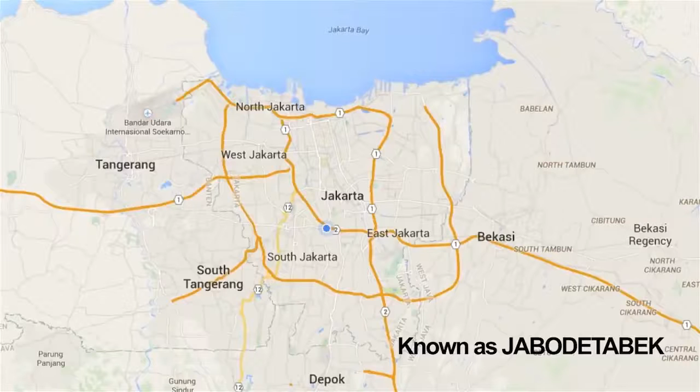Known as Jabodetabek, a name formed by combining the initial syllables of Jakarta, Bogor, Depok, Tangerang, and Bekasi, it is the second largest in the world. Yet the metropolis's suburbs still continue beyond it. With 28 million people in the metropolitan area, nearly 10 million vehicles in daily use, and a limited rapid transit system, Jakarta is strained by transportation problems.

The alternative solution to Jakarta's transportation problem shall be providing mass rapid transit that is environmentally friendly and powered by electricity. By adopting a system that is utilized in other countries such as Singapore and Japan, the Government of DKI Jakarta established the organization that is fully responsible for all activities, starting from the engineering service, construction, through operations and maintenance. The organization is PT Mass Rapid Transit Jakarta.

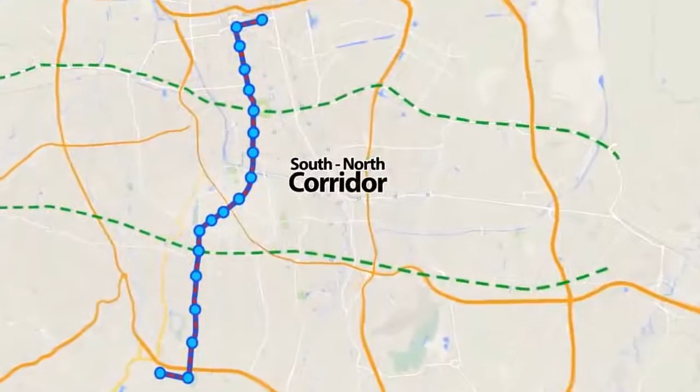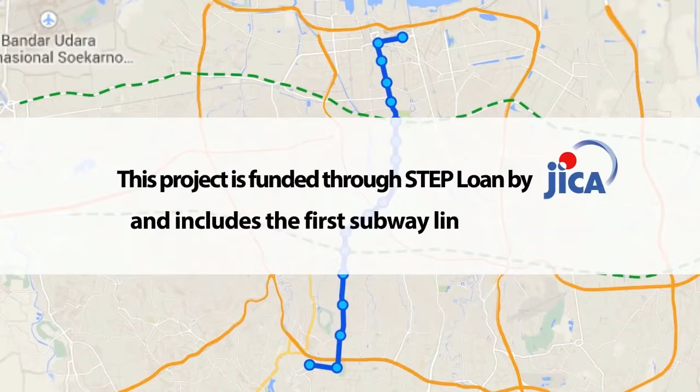Rail-based MRT Jakarta will stretch over 110.8 km of Jakarta roads, consisting of a South-North corridor of about 23.8 km and an East-West corridor of about 87 km. This project is funded through a STEP Loan by JICA and includes the first subway line in Indonesia. The construction of the South-North corridor that stretches along Lebak Bulus to Kampung Bandan will be carried out in 2 phases.

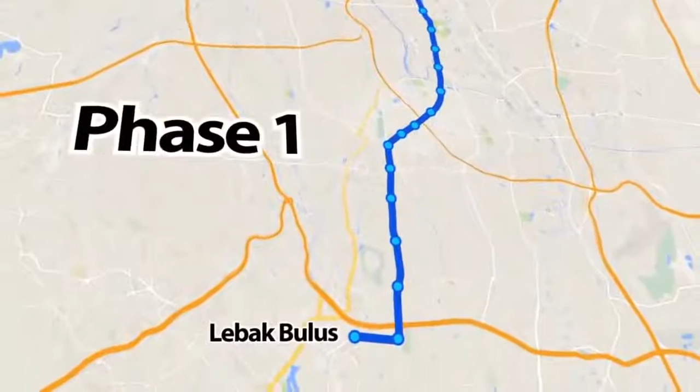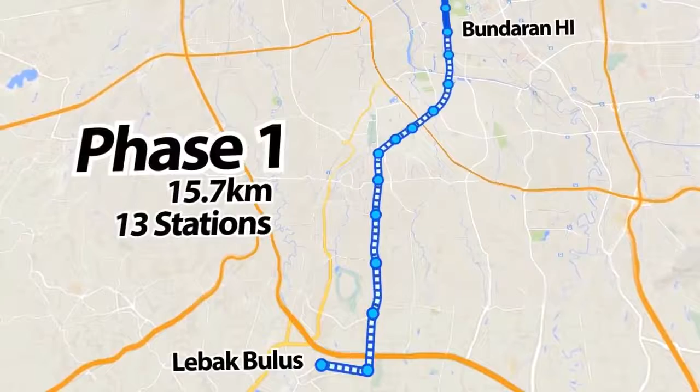Phase 1 will be carried out to connect Lebak Bulus with Bundaran HI over 15.7 km of railway with 13 stations, 7 elevated stations and 6 underground stations, which is targeted to operate by 2018. Phase 2 will expand the South-North corridor from Bundaran HI to Kampung Bandan over 8.1 km of railway, whose construction will have been initiated before Stage 1 operates.

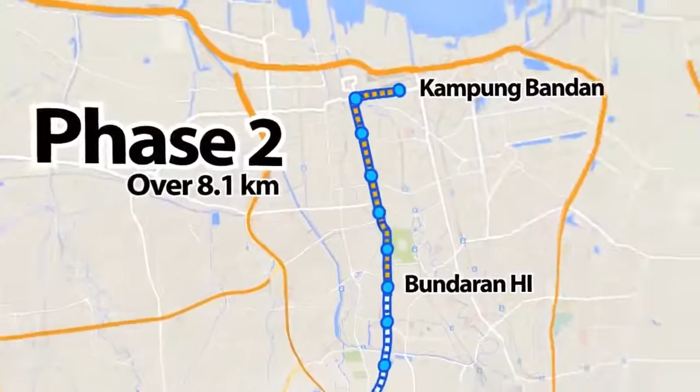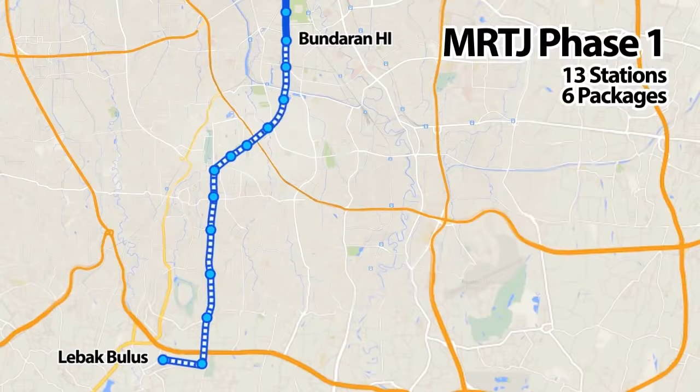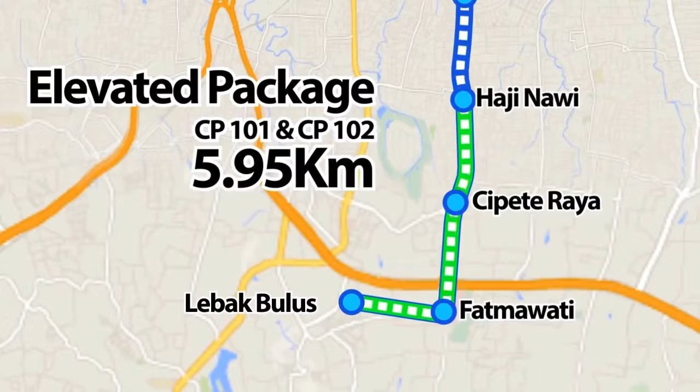The construction of MRT-J Phase 1, which includes 13 stations and 6 packages, has been underway since August 2013. Elevated packages CP101 and CP102 consist of Lebak Bulus, Fatmawati, and Cipete Raya stations along 5.95 km. Elevated package CP103 consists of Haji Nawi, Blok A, Blok M, and Sisingamangaraja stations along 3.84 km.

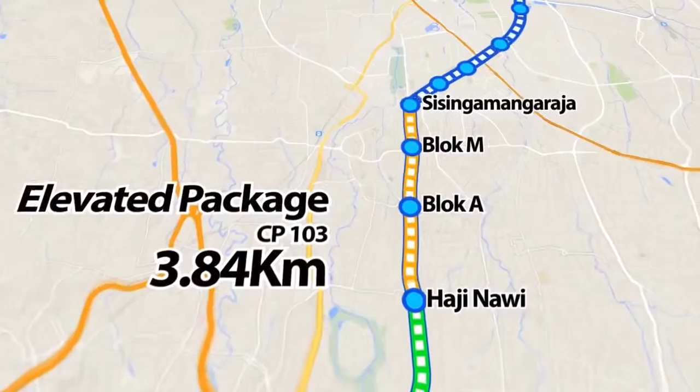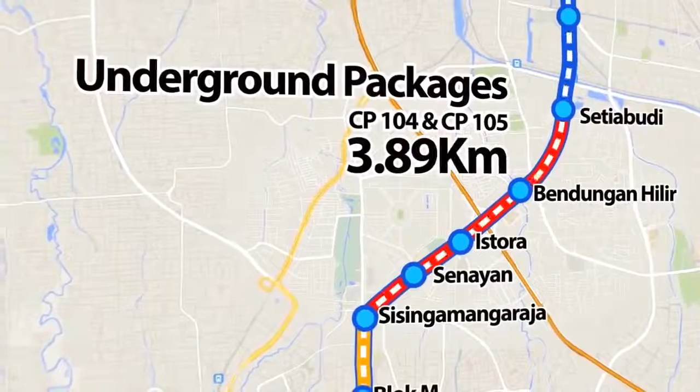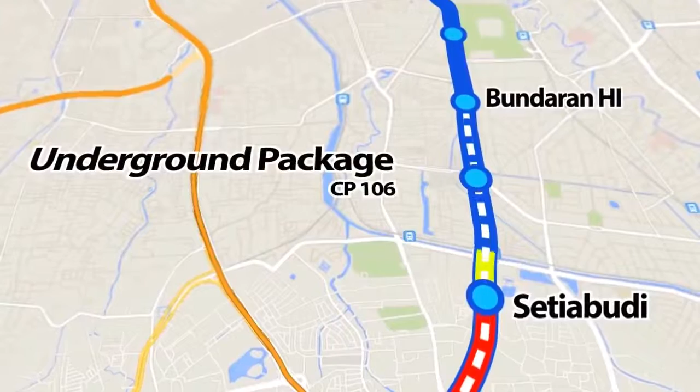Underground packages CP104 and CP105, which consist of the transition area, Senayan, Istora, Bendungan Hilir, and Setiabudi stations along 3.89 km, are carried out by Shimizu Obayashi Corporation from Japan, and Wika and Jaya Konstruksi from Indonesia. Underground package CP106 consists of Dukuh Atas and Bundaran HI stations along 2.02 km.

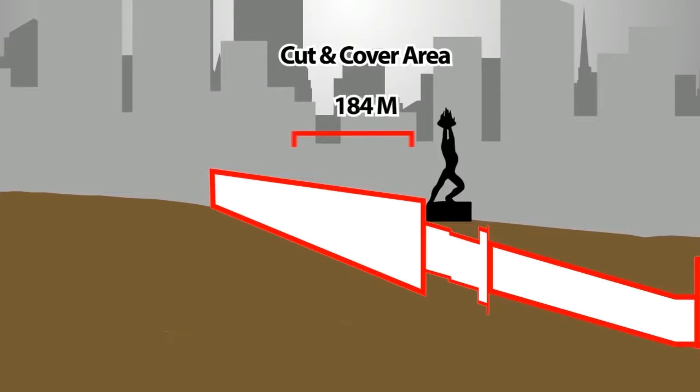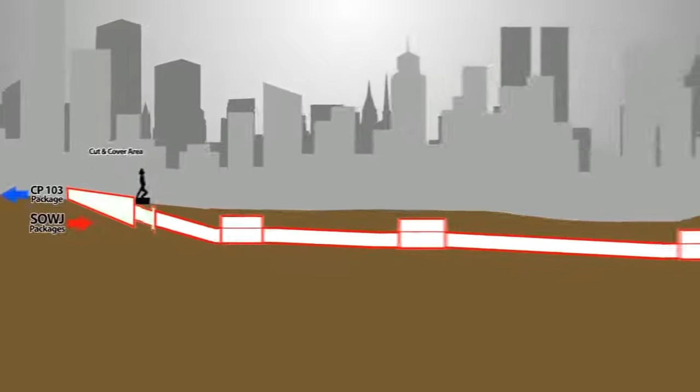SOWJ is the abbreviation of the Shimizu Obayashi Wika and Jaya Konstruksi joint venture, which constructs the CP104 and CP105 packages. Those packages are underground packages that include the transition area, station and tunnel construction with a total length of 3.89 km. The transition area, or cut and cover area, will be located from Sisingamangaraja Road until Bundaran Senayan along 460 meters. This area is a transition from the elevated structure of the CP103 package to the underground structure of the SOWJ packages, which will be constructed by the soldier piling method.

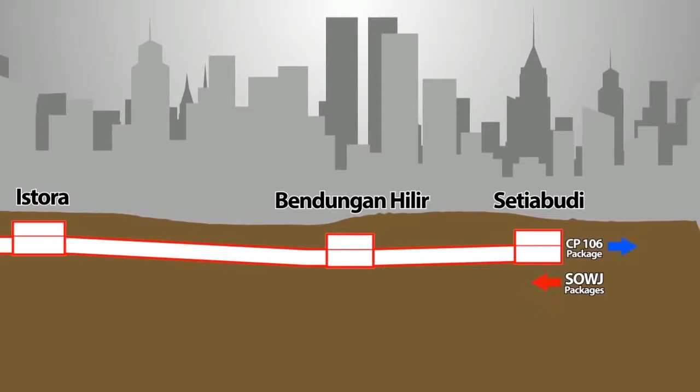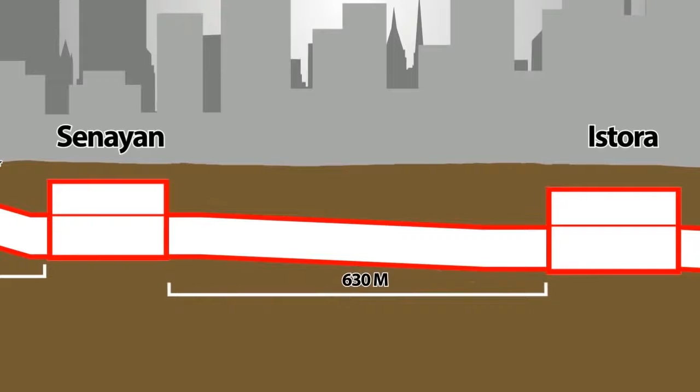There are 4 stations, Senayan, Istora, Bendungan Hilir, and Setiabudi, that will be established. The distance from the cut and cover to Senayan station is 322 meters. The distance between Senayan and Istora station is 630 meters. The distance between Istora and Bendungan Hilir is 1080 meters, and the distance from Bendungan Hilir to Setiabudi is 580 meters. The length of each station is 200 meters, except for Istora station, which will be 220 meters.

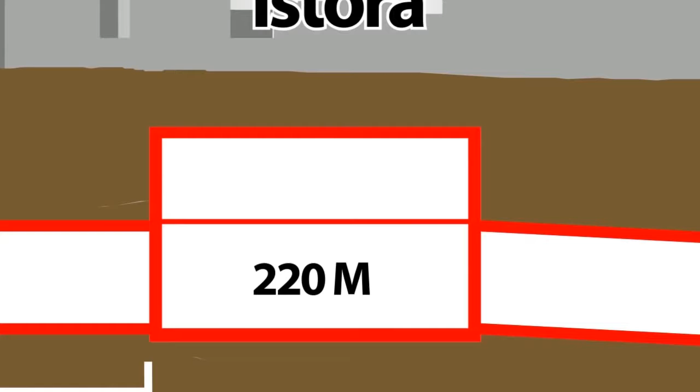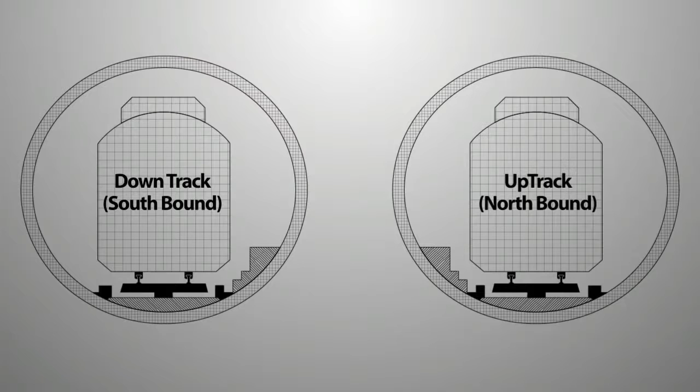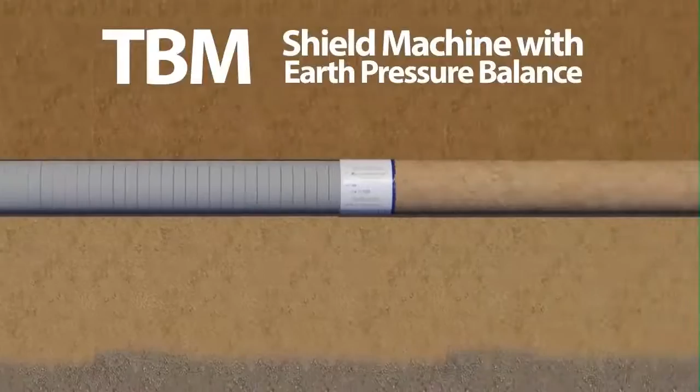The tunnel structure is for the railway of the MRT-J train. The tunnel structure consists of 2 lanes, the down track or southbound lane, and the up track or northbound lane. This facility will be constructed by a tunnel boring machine, also known as TBM. The TBM that will be used is a shield machine of the earth pressure balance type. The required inner diameter of the tunnel is 6,050 millimeters. This tunnel is completed with reinforced concrete segments as the supporting lining structure.

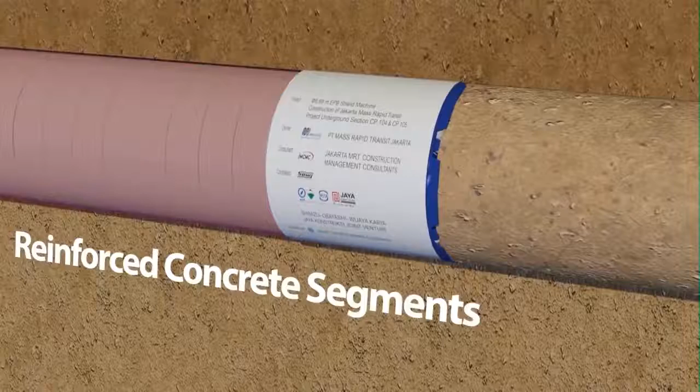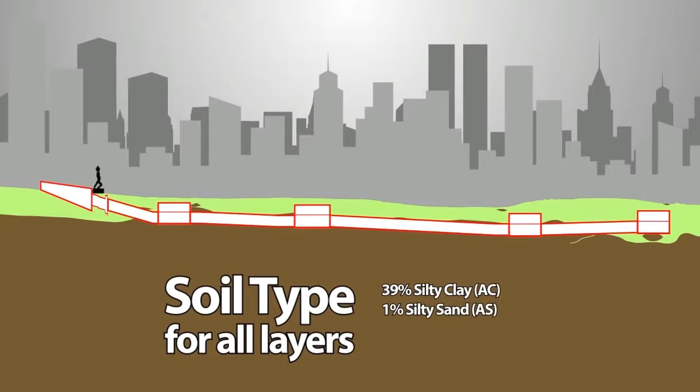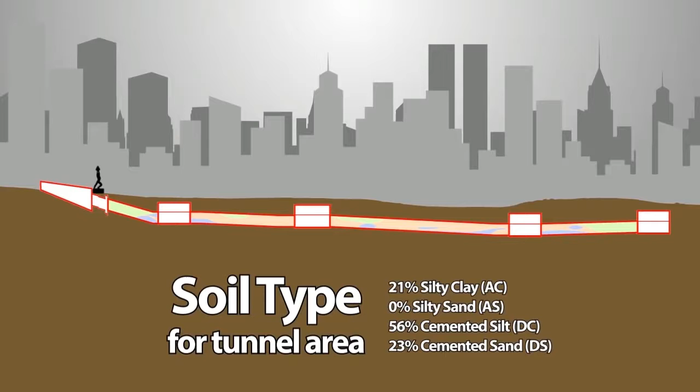According to the geotechnical report for the CP104 and CP105 project location, the tunnel alignment along Jalan Sisingamangaraja through Jalan Sudirman consists of 39% silty clay, 1% silty sand, 40% cemented silt, and 20% cemented sand soil types. This soil condition will affect the type of TBM utilized for this project. The majority soil layer passed through by the TBM is cemented silt. Due to that condition, the type of TBM selected for this project is the earth pressure balance shield machine.

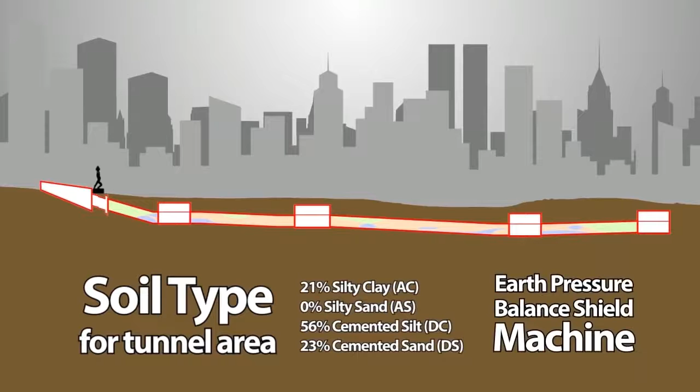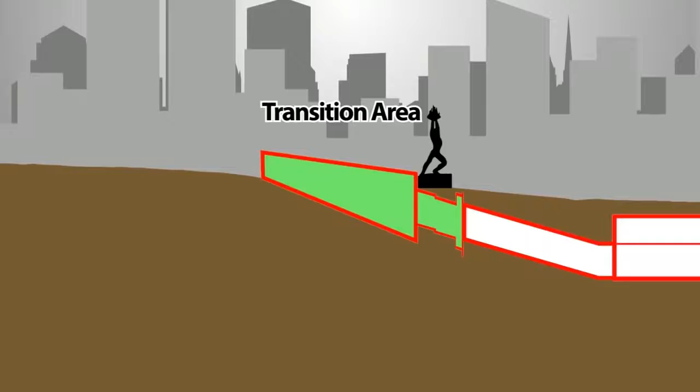The cut and cover area is located on Sisingamangaraja Road, bordering the CP103 package, until the Pemuda Statue at Senayan. This area is the transition from elevated structure to underground structure. The cut and cover area is constructed using the soldier piling method. H-beams will be used as the major material of the soldier piles. Before driving the piles, the position, alignment and orientation of the piles must be established.

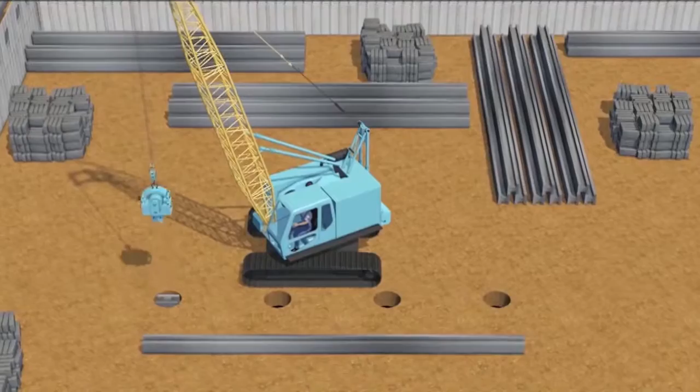Piles will then be driven by a vibratory hammer unit into the marked position. Piles shall be driven in a straight vertical position, otherwise driving will be difficult. All piles will be inspected for excessive camber or sweep. After completing the soldier piles, excavation of the first layer will be carried out.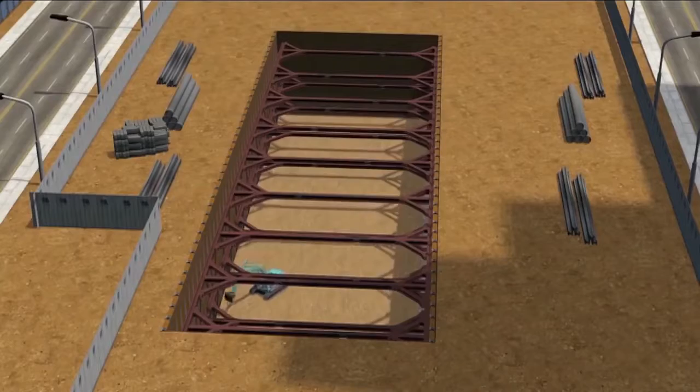And then a temporary deck and the first waler strut will be installed. Excavation of the second and third layers down to the base will be continued. The bottom layer will be completed with blinding stone and lean concrete. The base slab concreting process can then be started.

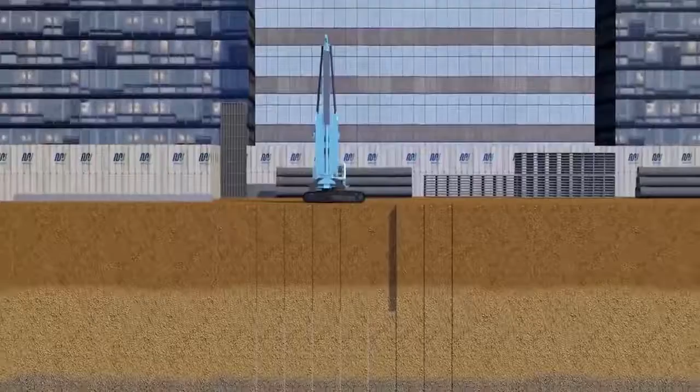The station is constructed using a top-down method. In order to retain the soil and water pressure while commencing a deep underground excavation for main station boxes, diaphragm walls will be constructed. The trench is excavated using a mechanical and hydraulic clamshell, and then a reinforcement bar cage can be lowered down into the excavated area. The next step is pouring the concrete, which is carried out by Tremie method. This cycle is repeated for all four sides of the station.

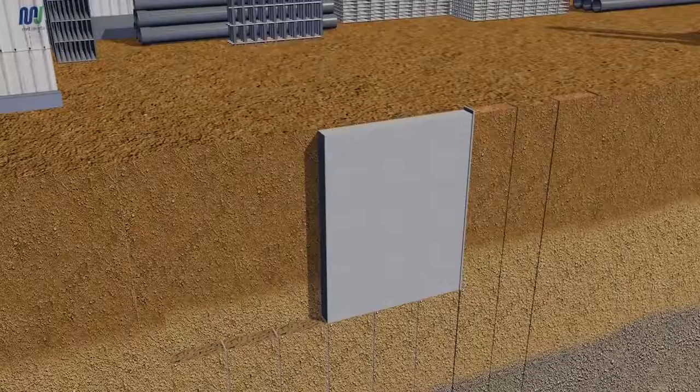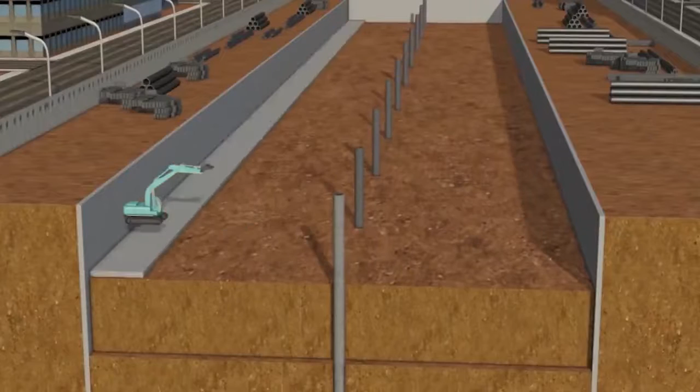The diaphragm walls will function as temporary retaining walls during construction and also as a permanent retaining wall for the station structures. Before starting the excavation process, king posts must be installed as a temporary support for the roof and floor slabs. The first excavation will be conducted and followed by the casting of roof slabs. With openings around the king posts, the second excavation can be conducted.

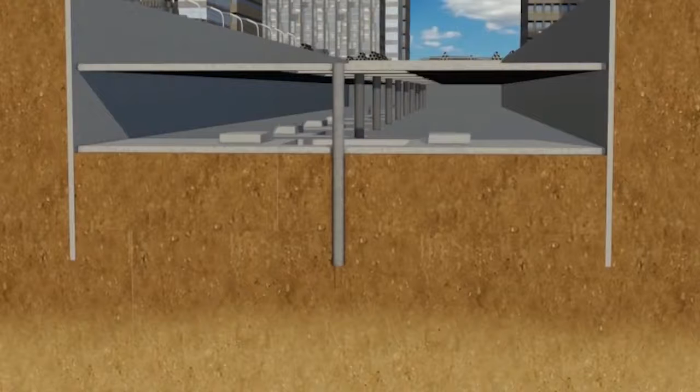After installing the concourse slab, a concourse column will be cast, and then the third excavation can be conducted. Before casting the base slab, blinding stone and lean concrete will be installed. The final process is backfilling the roof slab with soil and compacting it by grader and vibro roller.

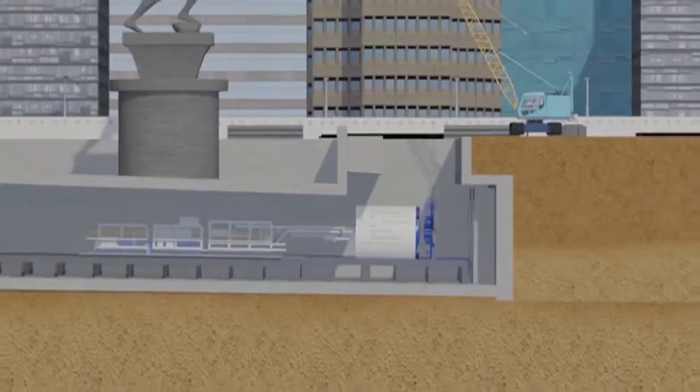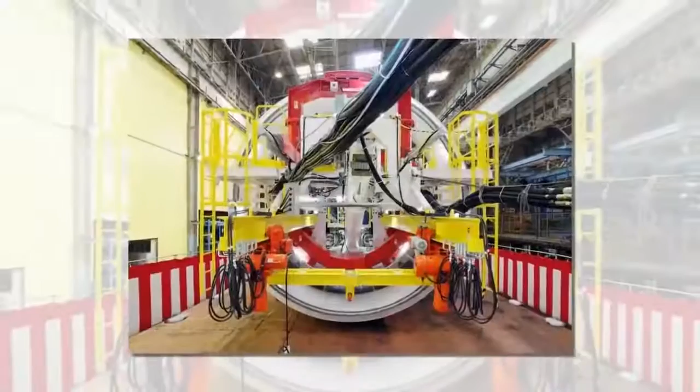The EPB shield machine is not designed as a whole complete component. Shield machine assembly is located at the launching shaft beneath Pemuda Statue Senayan. This machine is formed by some parts which have special functions for the tunneling work. When the TBM is completely assembled, it will be positioned facing the tunnel eye seal. The TBM will then slowly proceed forward. The tunnel eye will be broken by the TBM roller cutter. The TBM will then break out of the launching shaft and enter into the ground.

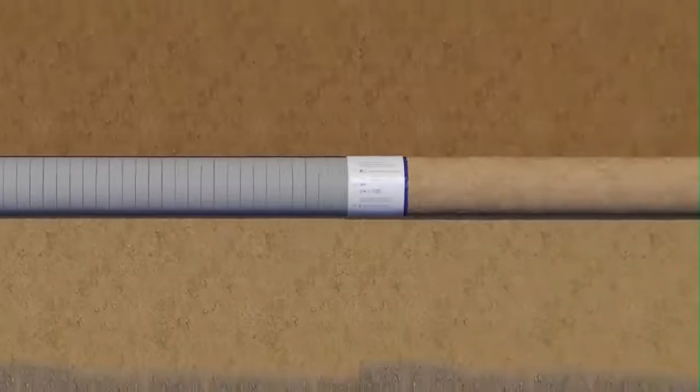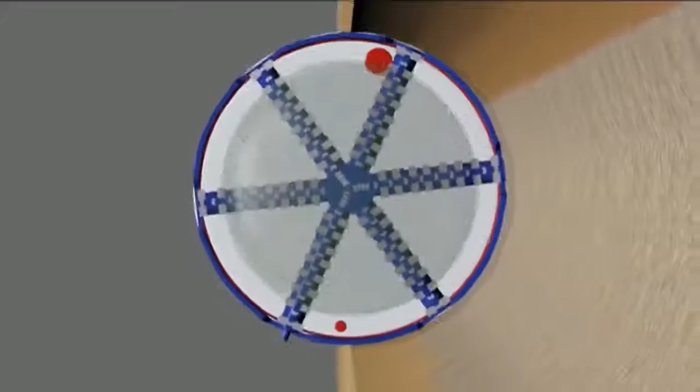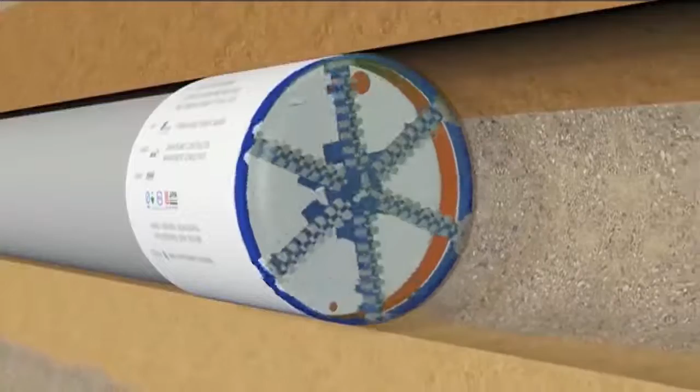The cutter head is the main component for excavating the soil. This project requires a circular spoke-type cutter head structure and flat front shape. To simplify the excavation process, a chemical injection will be required to produce a soil excavation result that is suitable for discharge by the screw conveyor. The chemical will be injected both at the face of the cutting wheel and within the cutting chamber. This chemical will be mixed with excavation material by rotation of the cutting wheel and the mixing arm.

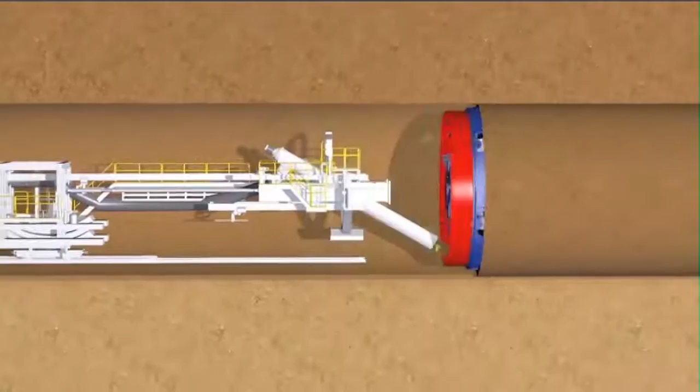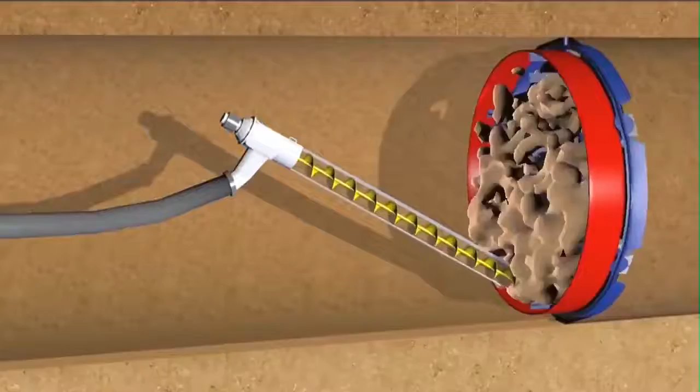After the cutter head rotates to excavate the soil, the disposal will be transported to a screw conveyor. The screw conveyor is used to deposit excavated material from the cutter head chamber onto the hose along the backup car. Soil disposal as a result of excavation will be transported from the screw conveyor to the hose system. The screw conveyor has one gate for muck disposal passed into the 14-inch hose. This hose will end at backup car number 1.

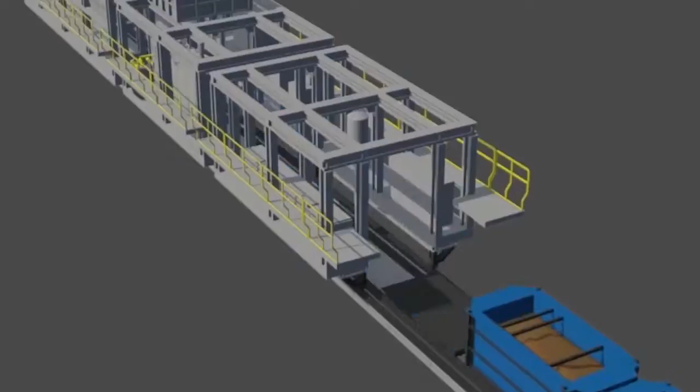Soil disposal from the backup car area will be delivered by muck car to the cut and cover area. The full muck car will be hauled back to the opening by locomotive, hoisted to the surface and emptied into the muck pit. Another locomotive will go back to the TBM carrying the concrete segments and 3 empty muck cars.

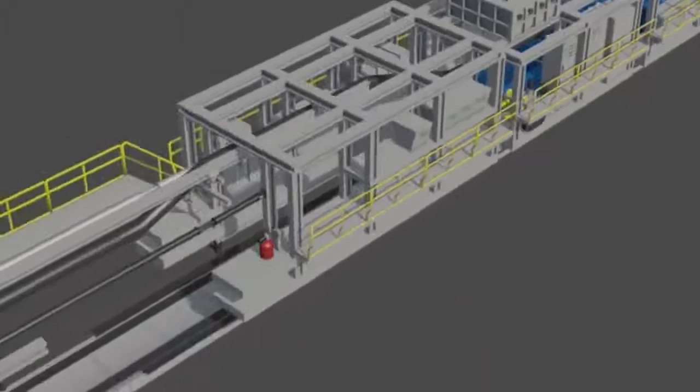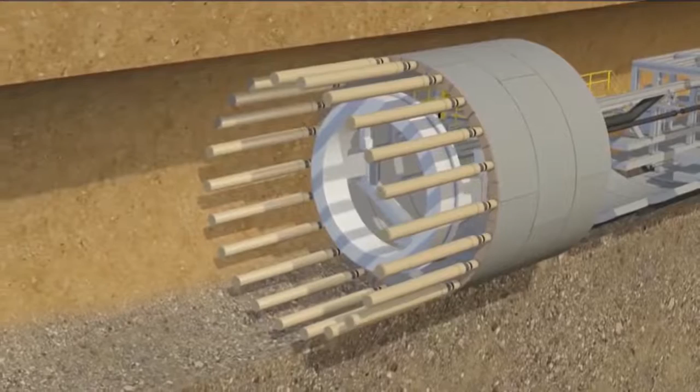After the excavation cycle is complete, the shield jacks are left locked onto the previously built tunnel rings to keep the TBM tight into the tunnel face, and only enough shield jacks will be removed to allow the placement of one tunnel segment at a time. The segment erector can pick up the first segment from the erector pickup area and place it in the correct position in the invert of the tail skin. Each segment is 1.5 meters wide with 25 centimeters thickness.

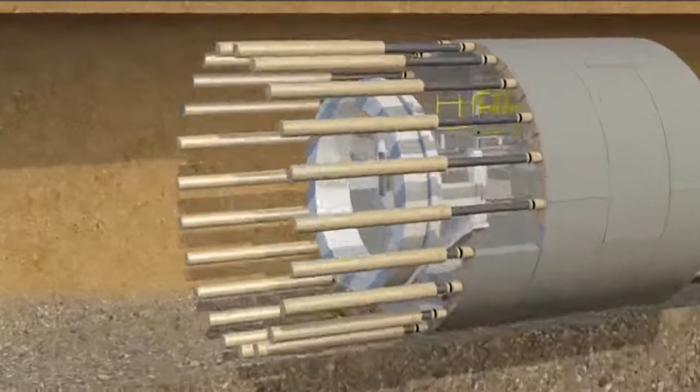The segment hoist is then operated to place the remaining segments into the erector pickup area. The ring build is completed by inserting the key segment and tightening all the segment bolts. After the 6 segments have been installed properly, the shield jacks will then push forward and the excavation will continue.

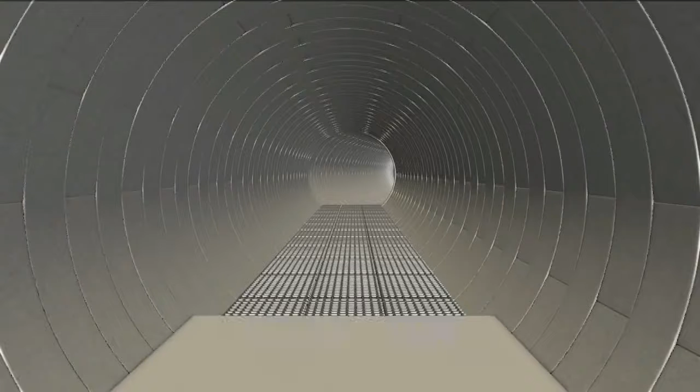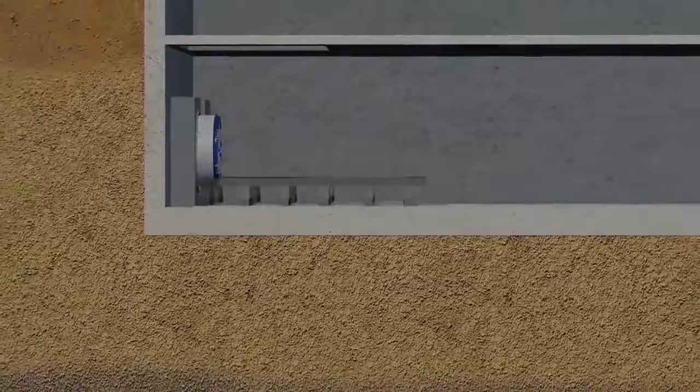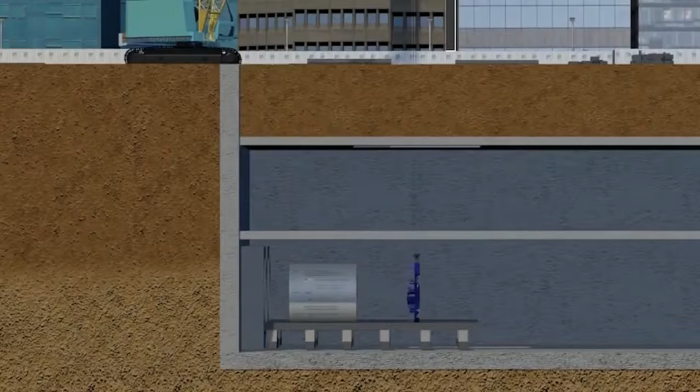The tunnel is finished by installing a concrete invert, which is a permanent structure for the bed track of the MRTJ railway. When the machine has reached a designated distance, the machine will arrive at stations. The final arrival is at Setiabudi station. And then the machine can be dismantled. One by one, the machine parts will be hoisted up to the surface.

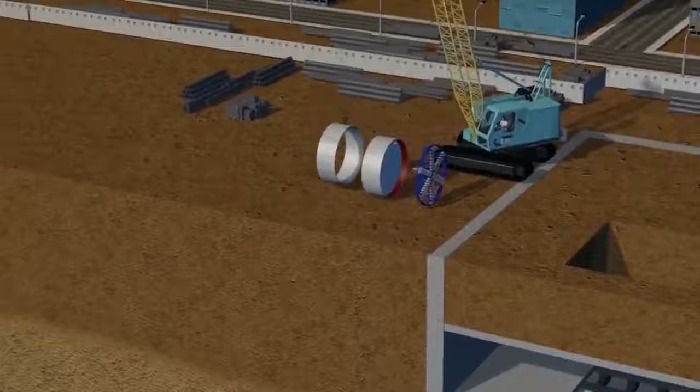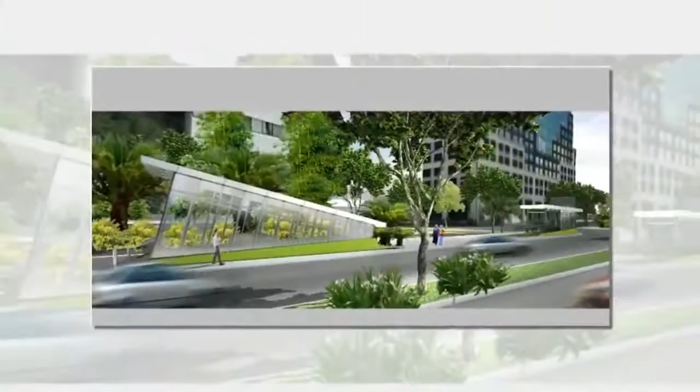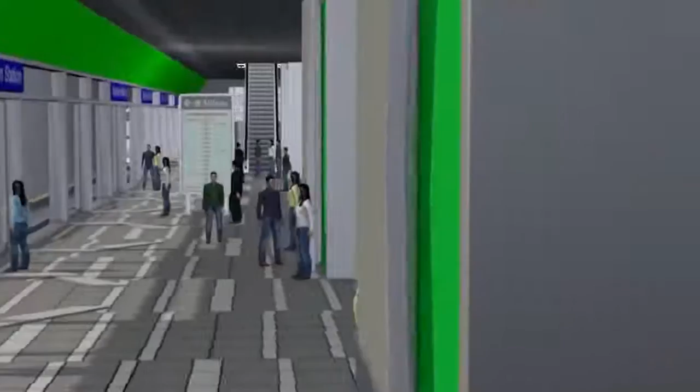After completing the station and tunnel structure, the next step is to install all the mechanical and electrical components, including architectural works. All stations' entrances and exits will be located at the pedestrian area for easy access for MRT Jakarta passengers. MRT Jakarta Phase 1 is expected to carry 412,700 passengers each day. Travel time between Lebak Bulus Station to Bundaran HI Station is only 30 minutes with 5 minutes headway.

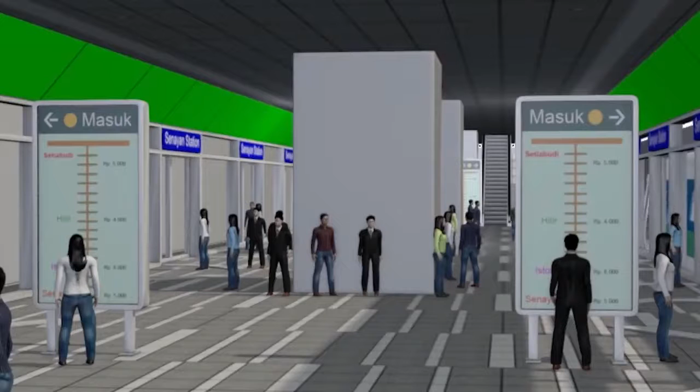This indicates that the target of this operation is for MRT Jakarta to be the primary alternative of public transportation. The final impact of MRT Jakarta will be to reduce the level of traffic jams and pollution in Jakarta. Traveling with comfort and safety will be experienced by Jakarta citizens with this MRT Jakarta operation.